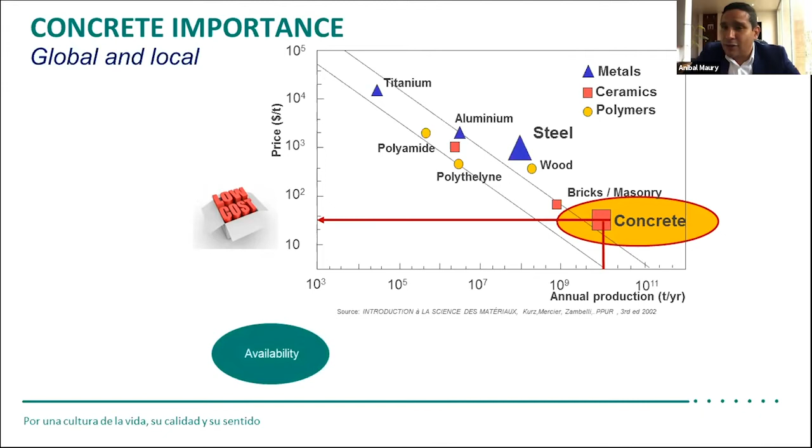And this is basically because concrete is cheaper than the other materials. There are also some other reasons I consider important to mention: it's available everywhere, so you can find the components—water, cement, rocks—mostly in any place in the world. Also, you can work with people that don't have high training or that doesn't require high training. So it's easy to work with many people compared to other techniques like steel, for example, the second largest used material for buildings.

Normally, you will require building technicians that can do welding and use proper tools. So there are still some disadvantages compared to concrete.

Then we have a very critical point, that is durability. Concrete is more durable compared to the other ones. It doesn't mean that it's eternal, but still some properties associated to durability are better than the other competitors. For example, for wood and steel, you will have to do a lot of maintenance activities very often.

Then we have another property, that is moldable. What does it mean? Concrete can have different shapes, and it doesn't matter where it is located. So based only on the casting place, you can obtain the shape you want. Compared to steel and wood, it's not the same, because steel cannot be casted in situ for a building, or it's not commonly done, because it will demand a lot of high temperature for doing this.

So basically, these are the reasons why concrete is so popular worldwide for doing buildings. However, as I mentioned, durability is one of the main issues, and surfaces of buildings are so important to avoid durability problems. But to understand the topics we are going to talk about today, it's very important to understand what are the mechanisms of damage of building structures, specifically concrete structures.

So you can have four main reasons associated to damages to buildings: mechanical, physical, chemical, and biological damages. All of them are really critical and important for the long lasting or life cycle of a building. So improving the relationship between a good design, a good material based on mix design, for example, of concrete, or an excellent construction process will guarantee somehow that the building can resist all these demands from the damage mechanisms.

For example, mechanical damages are associated to loads. What does it mean, loads? Well, for example, a building that was designed for housing cannot be changed to a library or a factory, because the loads considered for the design are only for living families and not for equipment, and vibrations can cause very big damage to a building.

That's one case, but it's also very important not to transfer design from one place to another. For example, in an earthquake risk zone, you have to design very strong buildings compared to other ones, and you cannot just move them very easily from part to part.

So this is very important for what we are going to talk today. But I want to remind you what are those mentioned phenomena that are going to be talked today. So corrosion is one of those. Probably steel corrosion is one of the phases you will remember for what is durability problems associated to reinforced concrete.

However, the problem doesn't start from the corroded momentum. The problem starts with the carbonation. Carbonation is the first phase of corrosion, if you can call it that. Carbonation starts with the diffusion of carbon dioxide into the surface of a building material and the production of calcium carbonate that reduces pH of the concrete, making it susceptible to corrosion, specifically in places where humidity is very high, salinity and temperature are high.

So corrosion is very easy in those places. That's why marine structures are always or normally corroded, but design of advanced coatings are required in those cases.

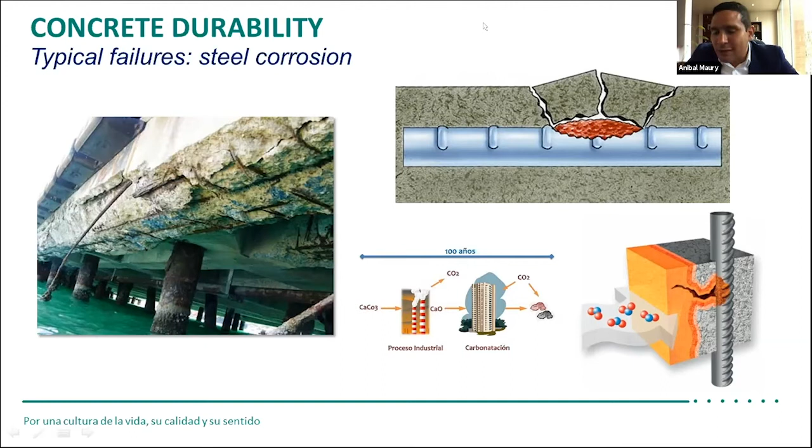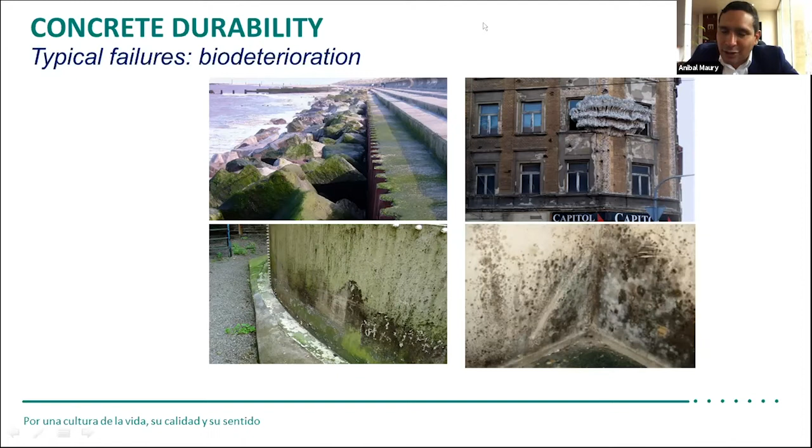Also in the upper part, you can see a building colonized by a fungi that has increased its size significantly in a huge manner. Also, there are some structures containing water that can have this situation, and some places indoor housing that are very critical, for example, not only for the building, because also they can affect human health. And we are talking about serious stuff in developing countries, for example.

But how is the mechanism working? So microorganisms find a place to fix. Not all surfaces are the ones they want. They look for surfaces that have a very low pH, high roughness, porosity, and not too intense light, but accessible to light, and also some humidity.

So these are the conditions that microorganisms like algae, bacteria, fungi, and some others find interesting to grow on. And then they feed on these nutrients, grow and reproduce, and during this biological process, they release some acids and sometimes introduce some roots in the building material that seem very simple on a human eye scale, but they are really important for what durability is focused on.

So they can really decrease durability, affecting the integrity of the element or the building. These elements normally die and they become part of nutrients that are useful for new microorganisms, more sophisticated and more complex to avoid.

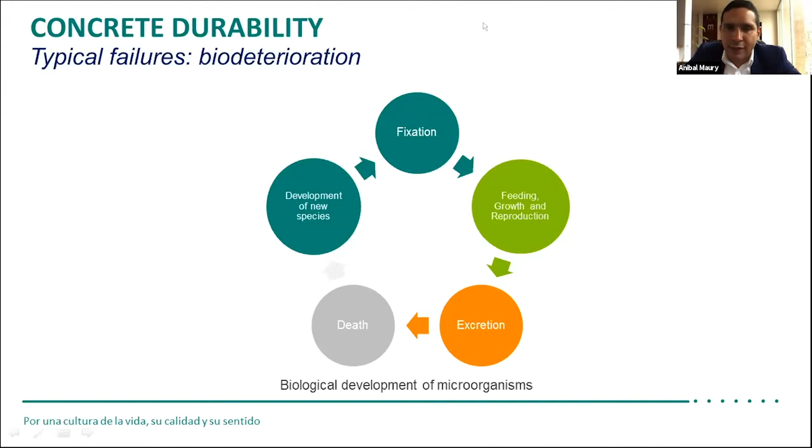So in the first stage, coatings can avoid the growth of microorganisms, and that's very important for increasing building durability. These are the microorganisms that have been very often studied for avoiding with advanced coating technologies, like bacteria, fungi, algae, lichens, and mosses. However, there are so many interesting things happening today.

For example, SARS-CoV-2, the virus that caused COVID-19, has been studied with photocatalysis to be degraded, because photocatalysis releases some substances that are able to stress the virus. Viruses have no cell wall, but it can still affect their biological process. So very interesting about what is going on in the planet.

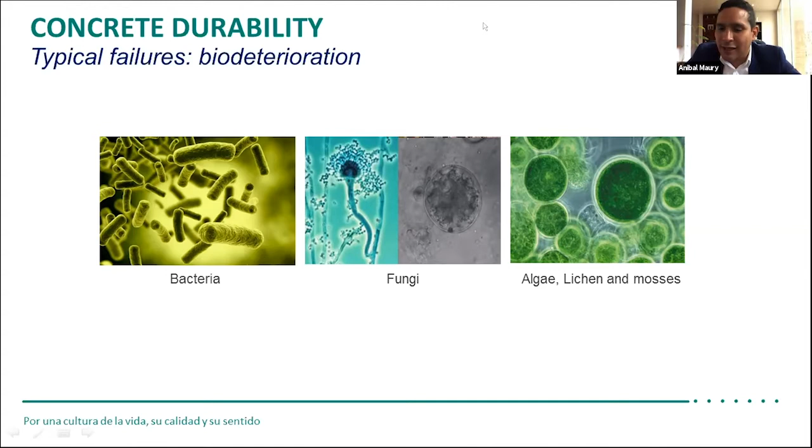There are some other damages in buildings that are very important because they demand a lot of investment in maintenance. However, they are not critical in the failure case. Some architects consider that aesthetical appearance is also a possibility of a failure.

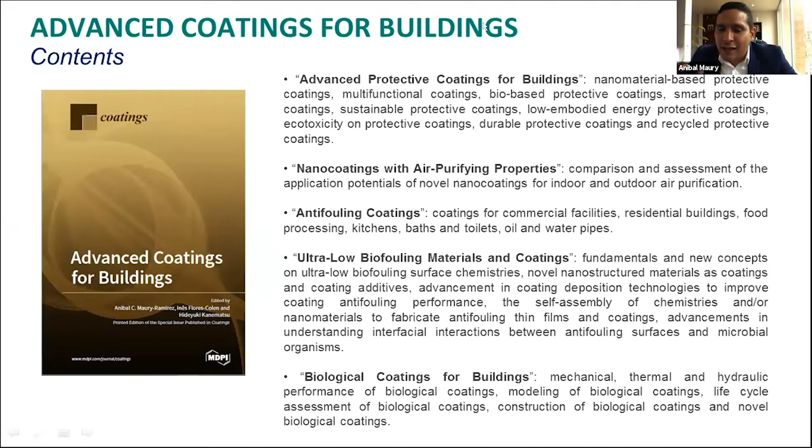This is a very interesting topic because it also considers biological coatings as an ally in the building system, improving thermal, hydraulic, and other environmental issues associated with sustainable construction. So biological coatings are also a way to improve the relationship between traditional civil engineering and construction materials and the environment. And probably this approach has been one of the oldest ones.

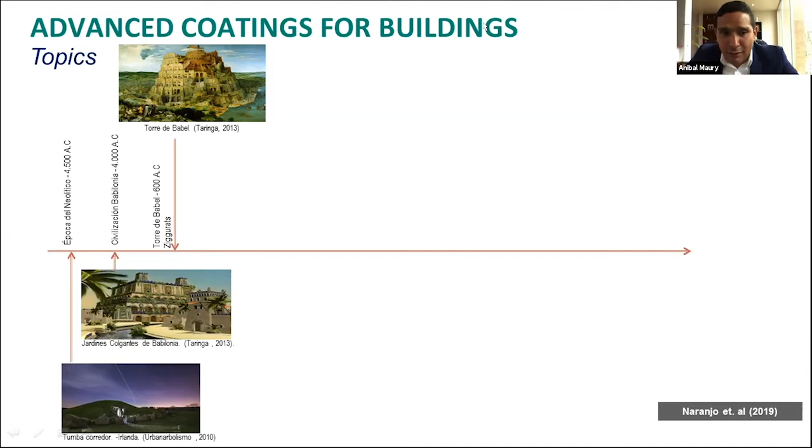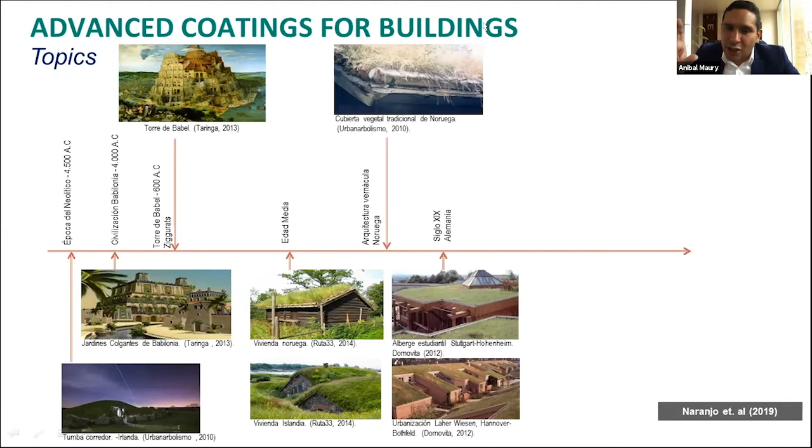For example, in the Babel Tower, biological coatings were used for reducing the interchange of heat between the exterior and indoor of the tower. And they are still related in several books. There is also evidence of using biological coatings like green roofs in medieval times. In the Nordic countries, they also used these covers to reduce the interchange of cold between the interior and the outdoor of the buildings.

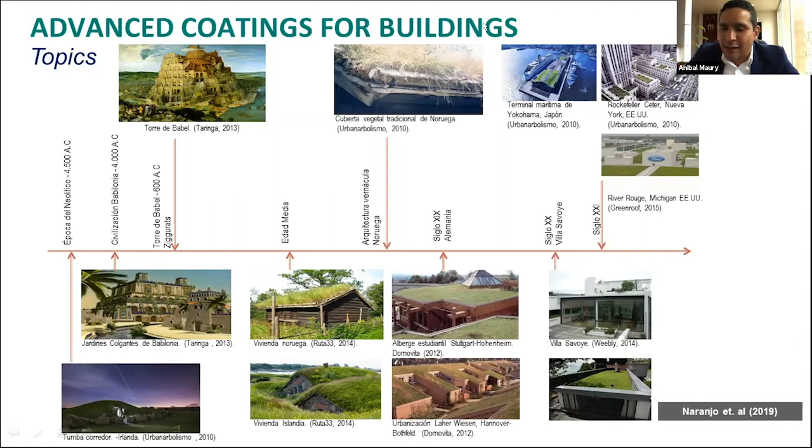This also has been included by modern architecture. Le Corbusier included green roofs as one of the main aspects in construction, as a technology to reduce the impact of urbanization in cities. So this book also deals with this topic: how to use biological coatings in a good way towards building performance.

And in this case, Naranjo et al. developed research based on the study of different recycled and reused materials to compose green roofs that were evaluated at outdoor conditions in controlled rainwater systems. For example, the drainage layer of a green roof in a building is normally composed of natural aggregates. In this case, this was replaced by recycled rubber coming from tires, a very problematic topic in the world, PET bottles,

and an HDPE tray. So all these systems were compared on three things: weight, which increases mechanical damage; second, hydraulic performance, absorbing water and releasing it to the pipelines to evacuate rainwater. Normally it is a very efficient system. And then we have another topic, the thermal isolation. I think this is a very interesting approach for this new generation of green roof systems.

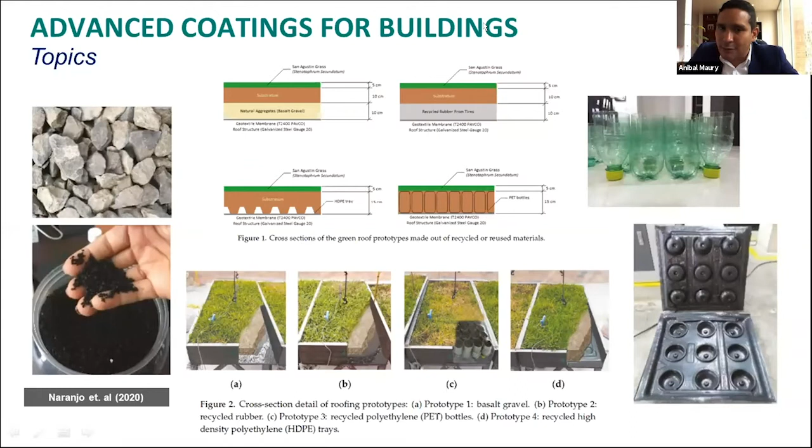So the idea of this is to improve the relationship of urbanized areas in cities and integrate them into the ecosystem where they belong, not only developing functions for the building, but also giving things to the environment, like air quality, growing of biological species, and so on. Agriculture, urban agriculture, so many topics come with this.

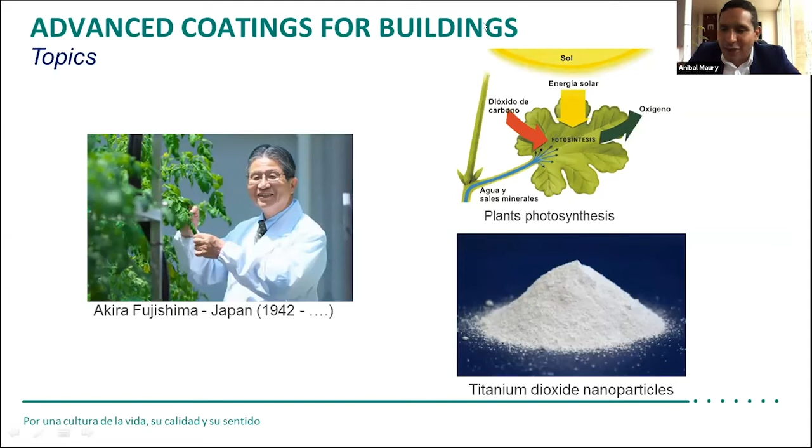And there is another interesting and advanced topic, what is called photocatalysis, that is being studied and developed worldwide by Akira Fujishima from Japan. In the 70s, Professor Fujishima tried to simulate what plants do with photosynthesis, using carbon dioxide, solar energy, water and minerals to absorb CO2 and produce O2, oxygen. So he, using nanotechnology, tried to degrade some pollutants in air and other things that are affecting the durability of a building.

How does it work? It's a little bit more complex, but I will try to explain it very easily. A titanium dioxide nanoparticle is a semiconductor material which has a valence band and a conduction band. When this material is in contact with UVA light, an electron from the valence band will be energetically activated and move towards the conduction band. Then this electron will leave a hole behind, charged positively. The difference between those two represents the band gap.

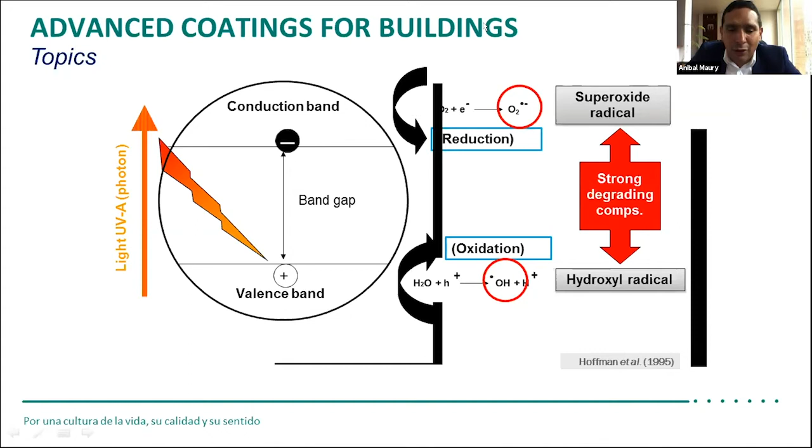The electron and the hole will interact with oxygen and with water present in the atmosphere and will produce highly degrading substances like the superoxide radical and the hydroxyl radical OH. Both of them have strong degrading capacities, not only for decreasing air pollutants, inorganic and organic. They also have the potential to reduce substances in a solid state. For example, breaking down the cell wall of algae will help the system reduce their growth on building surfaces. This is a very interesting approach that has been studied also in this book.

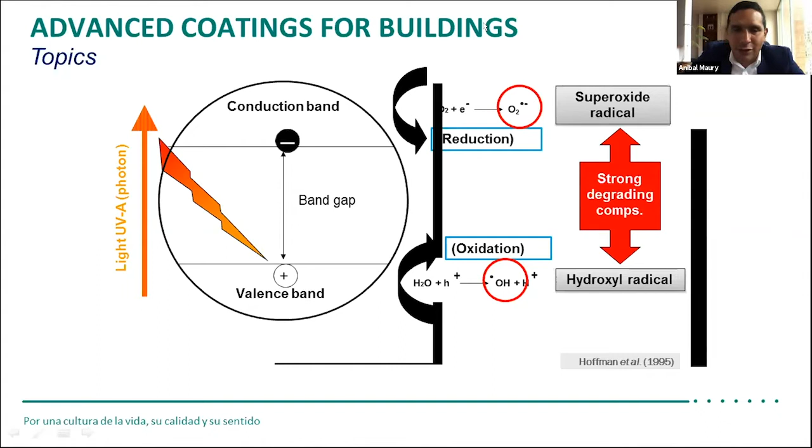So these technologies are already applied, in some cases in pilot projects worldwide. In Rome, for example, you can see titanium dioxide photocatalysis applied for self-cleaning properties in this church that was constructed by Meier for the 2000th anniversary of Jesus Christ. Also in Belgium, on the north coast, in Ostend, a building has 5% titanium dioxide as a coating on its facades.

So the results are not completely fine. That's why so much research is published in these books, because efficiency is sought by changing the crystal structure of titanium dioxide, by adding external atoms, for example, and many other strategies like incorporating recycled glass and so many other things that you will find interesting to read.

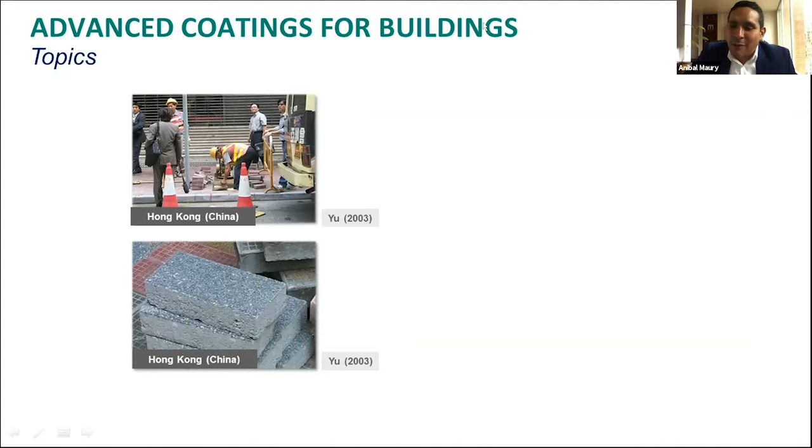Many other applications, as I mentioned, are used for air purifying properties. Paving stones including titanium dioxide have been used in Hong Kong for reducing air pollution. So next to one of the main sources in urbanized areas, which are normally cars, paving stones are included as a medium to reduce air pollution.

Also in Belgium, in Brussels specifically, we found a tunnel, Leopold II, that includes titanium dioxide coating, using UV light to improve and increase the photocatalytic activity. That's also included in the paving stones in Antwerp in Belgium.

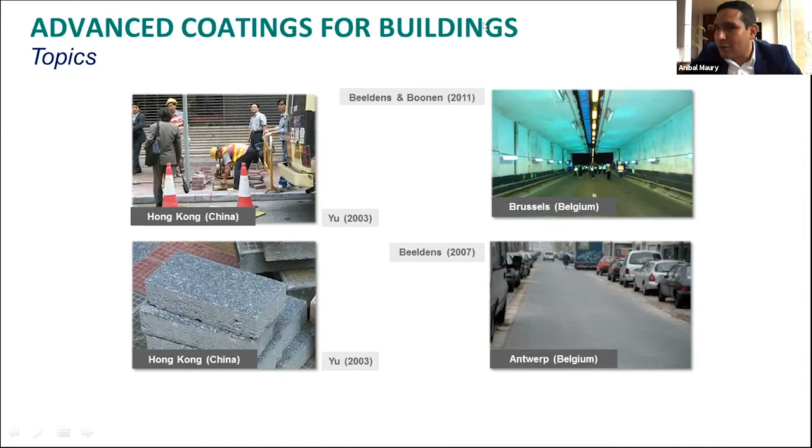So all these strategies are looking forward to an advanced system of construction that not only resists the load demands of the use of traffic or some other stuff. The point is to give new functions to materials based on the demands of the environment. I guess this is one of the main points of the future in advanced coatings.

Finally, this research also has been included by Italcementi, which is evaluating the inclusion of a big area of Milan and evaluating what the impact on air quality will be for these major cities. Results are very promising, specifically in dry conditions, so summer conditions, but not so promising for winter times, when the water comes in contact with the nanoparticles.

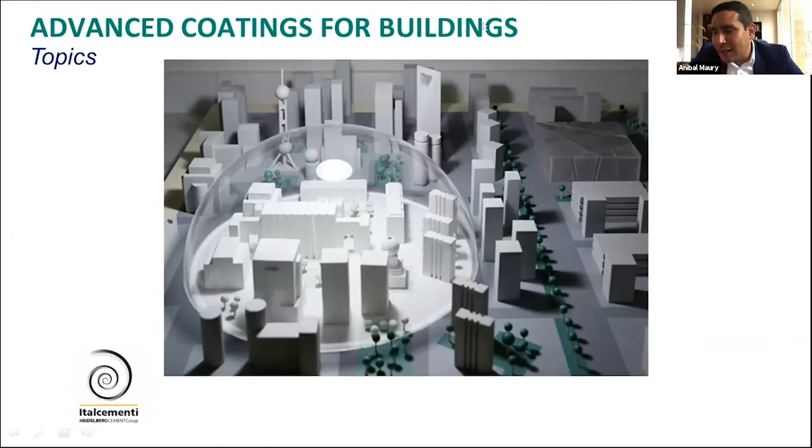Basically, these are the main or major topics that you will find in this interesting book on advanced coatings for buildings. But I will leave the word to my colleague, Professor Inês Flores-Colen, who will talk about the importance and challenges of protective treatments. Really important also for durability and giving new functions.

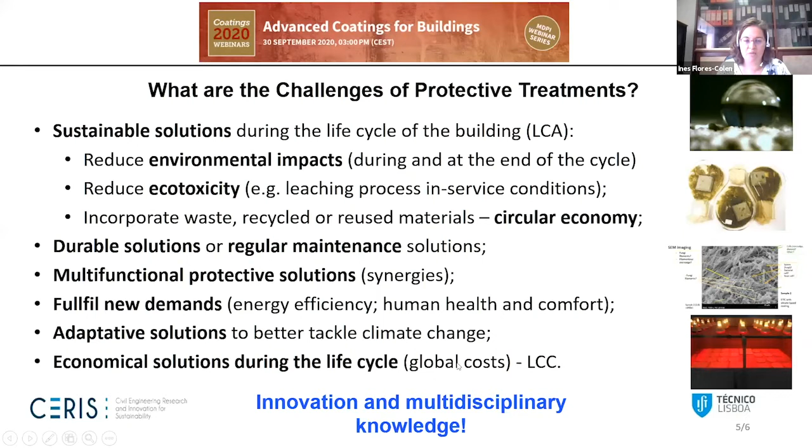So this is an idea, but maybe you can have other ideas or other suggestions that we can put in this list.

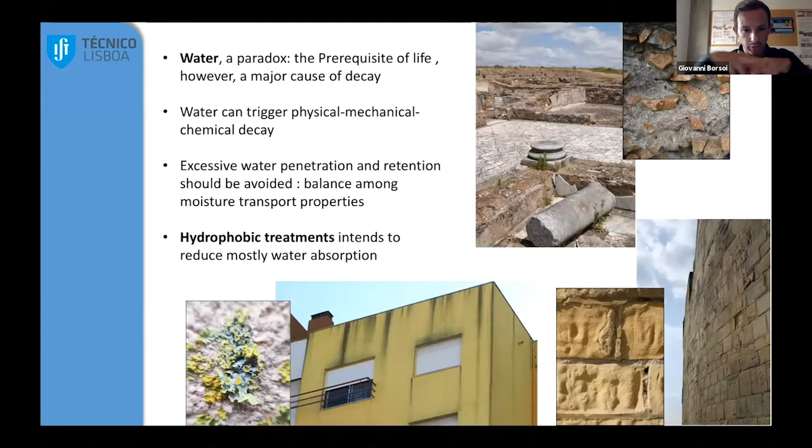Since it's the prerequisite of life, it's also a major cause of decay, since it usually triggers physical, chemical, and mechanical degradation. Basically, what we are looking for is to reduce the penetration of water, and especially the retention of water, and so to balance the moisture transport properties within the building material, especially with porous building materials. In this sense, hydrophobic treatments can be effective because they modify the contact angle, basically.

So we are looking for something with a lower surface tension. The application of this non-polar material can repel water, which is a polar substance. This is simple to explain, but there are a few prerequisites which should be respected when dealing with hydrophobic materials, especially with built heritage like limestone or mortar. We need three requisites, which are compatibility, durability, and effectiveness.

Compatibility is a big issue most of the time, because we need to respect the physical, chemical, and finally aesthetic features of the substrate. On the other side, we need long-term durability of those agents, which should increase the life cycle of modern materials, or even century-old materials like historical mortars or limestone. Another requisite is in-depth penetration if we're dealing with porous materials.

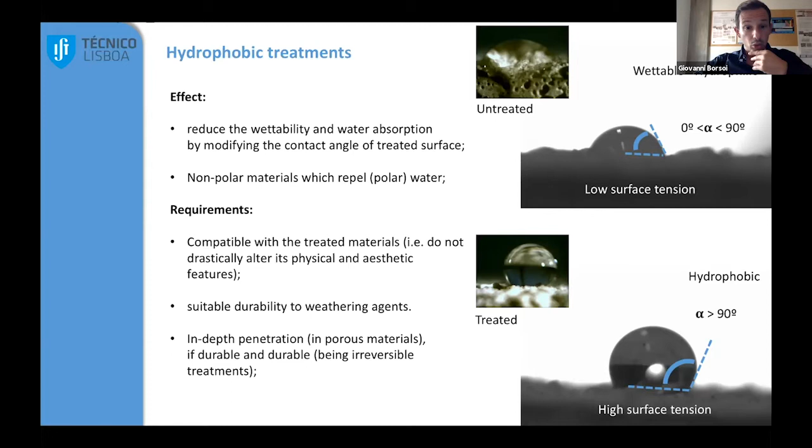We need to consider that most of those treatments are not reversible. So we need to make the right choice and be aware of the possible drawbacks and side effects. And this is the base. Then, if we look at the market, the most used hydrophobic treatments at the moment are silicon organic compounds.

So basically those materials, like silane, siloxane, and/or other resins, are based on silica and functionalized with the alkyl group. And those usually have a lot of benefits if used as a hydrophobic product, because usually you have a high resistance to oxidation processes, especially in brand new paints or brand new products, and extreme pH environment resistance. But on the other side, we know that there might be problems related exactly to those two components, especially after a few years.

On the other side, there is a wide application of those materials also because there is an aesthetical compatibility and they're kind of easy to apply. And they are irreversibly bonded to the mineral substrate on the treated material. Then there is an issue, which is still the durability, because most of the manufacturers are not reporting the durability. They're just arguing like 3, 5, 7 years, up to 10 years, which is kind of ambiguous, because it's difficult to make the right choice sometimes for a specific material, especially as they're not providing much information about the compatibility among materials and the specific products.

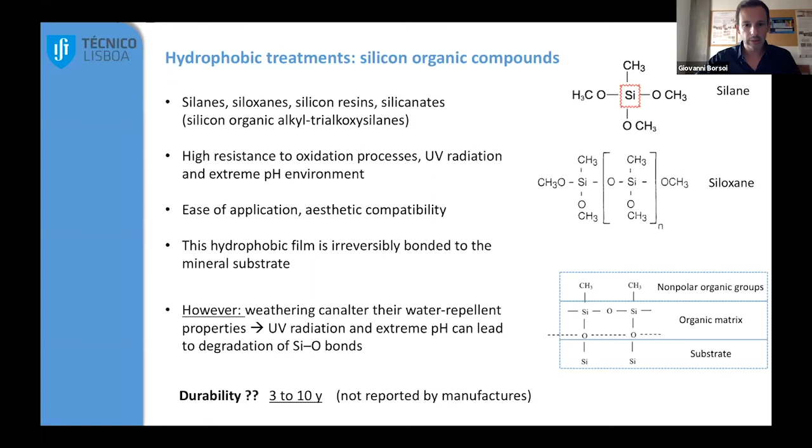So this is the main question, because we know that there is a compatibility of silicon organic compounds as hydrophobic materials. On the other side, we know that there is a problem of durability. After a few years, problems arise. And so we don't know exactly which are the dynamics beneath those issues. So durability and effectiveness are going on the same level. Maybe we have super hydrophobic materials in the first 2-3 years, then there is a degradation, and we end up after a few years with a problem. So we are basically accelerating the decay of the material, because those irreversible treatments cannot be taken out of the treated materials.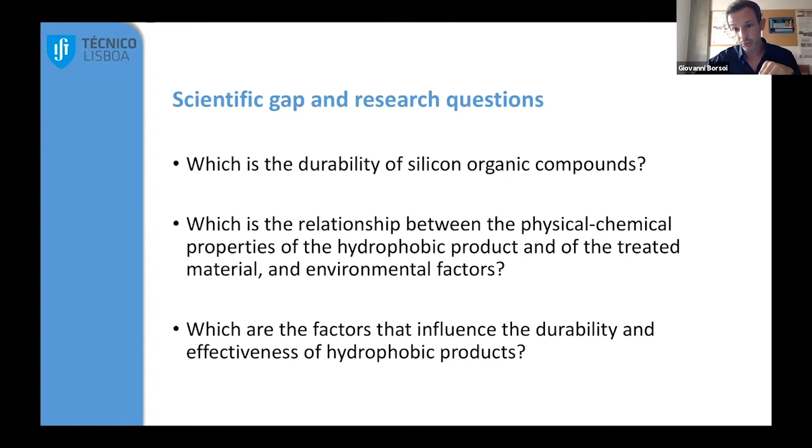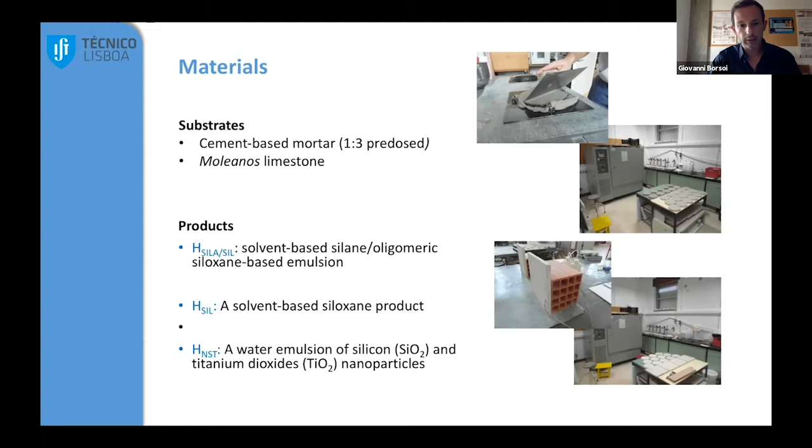So in this research, we have focused on a few materials, a couple of cement-based materials actually, a limestone and a mortar. And we have been focusing also on silane or siloxane products, a siloxane product. And finally, the third product is basically an emulsion of silicon and titanium oxide nanoparticles.

Basically, those are the methods. We have been applying the materials with a specific process, which you can find in the special issue. Actually, all the details are in the special issue. I will just give an overview. Then we have been focusing on the moisture transport properties, so the capillarity, water absorption, the drying, the Karsten tubes test, and the water vapor permeability. And finally, we repeated all those tests after artificial aging. So I'm going straight to the results.

What we can see here is that there is a strong influence on the capillary water absorption when dealing with those silane or siloxane based materials. For example, if we look at the stone, there is a strong reduction, up to 88%, of the water capillary absorption. And there is a linearity among all those products. After artificial aging, we still have quite a high reduction of those values. It can be quite unexpected, since maybe we're expecting the capillarity to increase after artificial aging. But with the limestone, there is probably a pore filling due to the artificial aging, which is decreasing the water capillary absorption.

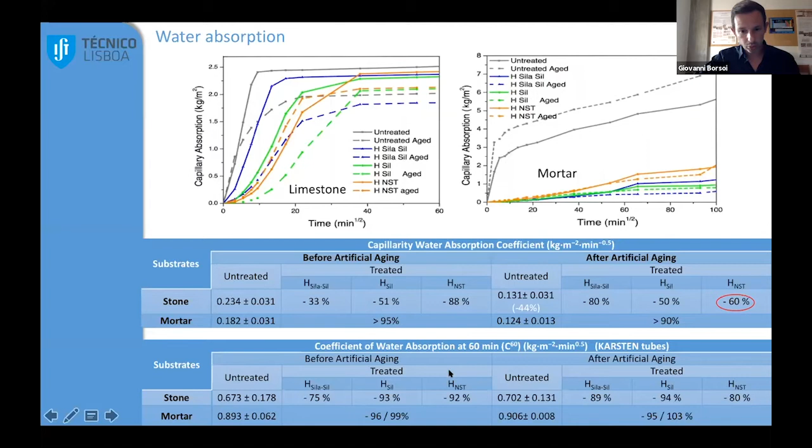Those two silane or siloxane products are quite linear. On the other side, there is an inverse trend after aging: after artificial aging, there is an increase of the water capillary absorption in the case of the nanostructured product. The mortar is not much affected, because in both cases there is a high reduction of this water capillary coefficient, and this is reflected also in the Karsten tubes test. The same trend can be seen also on the limestone.

When we look at the drying kinetics, in the case of the limestone, we can see that in all the cases the liquid phase evaporation, the first step of drying, ends after 1 day. So in all the cases, at 24 hours there is basically an inversion of the drying process to the vapor phase.

On the other side we can see, and this is the limestone, on the right you can see also the mortar, and in this case you can see the variation, so the transition from the liquid to the vapor phase is usually up to 4 days. So those two materials are very different because of the porous networks.

And once again, if we look at the drying index, we can see that actually there is a slight increase of the drying index after the application of the hydrophobic products. In the case of the nanostructured product, this increase is very low, and it ends up similar as well after the artificial aging. So it seems that those nanostructured products are pretty suitable for this kind of limestone.

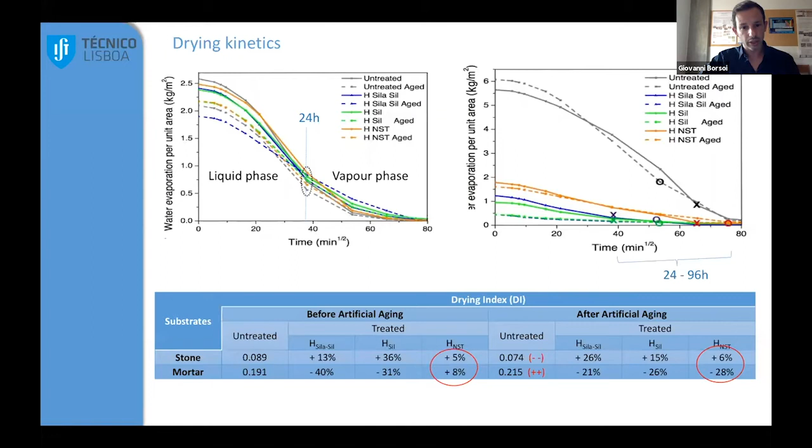Then there is also another interesting part, which is the water vapor permeability. We can see actually that there is a huge increase. So the hydrophobic materials are really affecting the water vapor permeability, and mostly the siloxane-silane product is affecting strongly this behavior. On the other side, the nanostructured one is more compatible, or at least less invasive compared to the others. And after artificial aging, once again, the nanostructured material is much better because there is lower reduction of water vapor permeability.

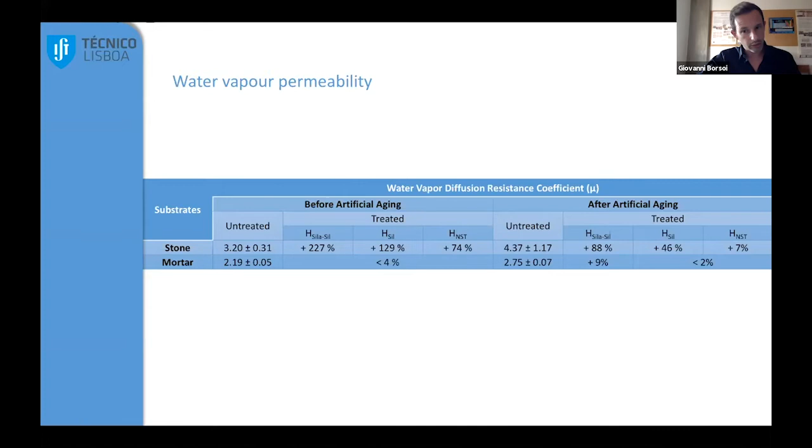Once again, the limestone has a very different behavior when compared to the mortar, where the porosity is much higher, the pores are bigger, and so the reduction is lower because the product cannot completely fill the porous network.

And so basically we can summarize what we have seen in the previous slides. If we look generally at the application of the hydrophobic product, we can see that there is a reduction of the capillary absorption, and that is what we are looking for actually. So those are positive properties. Then the second one, which is the drying index, we can see there is a differential behavior among the limestone and the mortar. And this balance should be respected. That is, the drying time should not be modified, because if you're looking for a very compatible material, you need something that is not completely affecting the drying phase, the drying index.

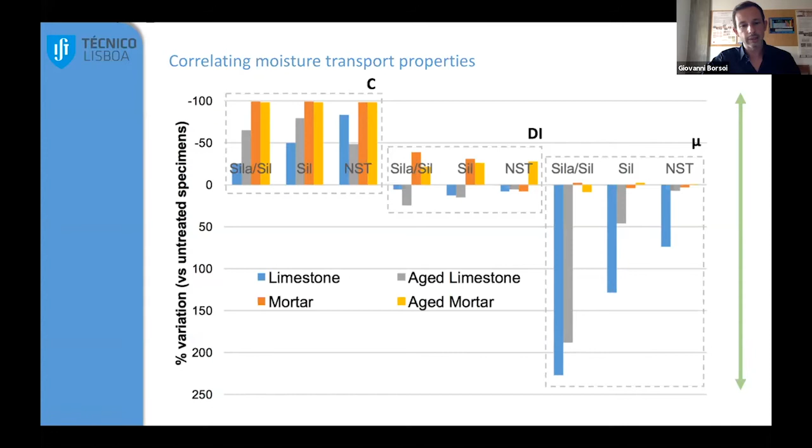At the end, we have also the water vapor permeability, and we can see that, for example, in the case of this siloxane-silane product, there is a huge decrease of the water vapor permeability. And so for sure, this is something that we are not looking for. We're looking for something that is slightly affecting this value, and so once again, respects the properties of the original material.

So to conclude, since I'm already almost out of time, the main lesson I would say is that you need to fine-tune the effectiveness of the water repellent based on the properties of the treated materials, and of course based on the typology of hydrophobic product that is applied on those materials. For example, the limestone has a much lower absorption compared to the mortar. So you need to consider this. You need to look for something that is respecting those physical properties.

And then you need to consider that durability, which is connected to those artificial aging tests, affects the materials in a different way as well. For example, we have seen that the nanostructured material has a very efficient feature over time, but on the other side, these nanostructured silica and titanium-based materials are less durable, because after artificial aging there is probably a decrease, and this is due mainly to the structure of the titania, which is linked within the porous network of the silica nanoparticles.

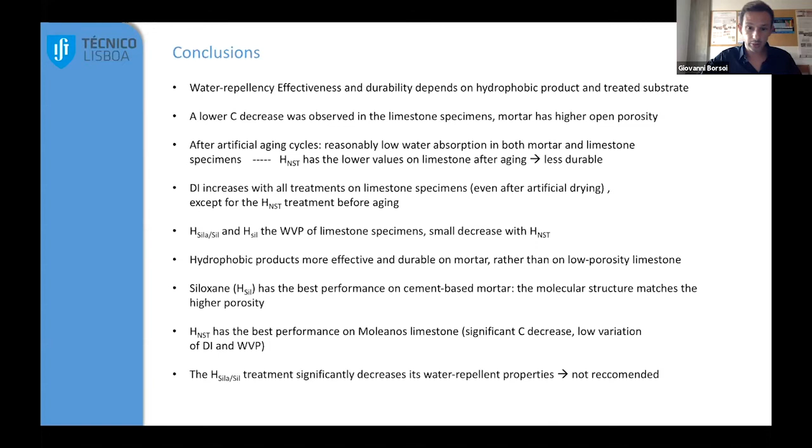To give an idea about what is going on at the moment in the project, as Professor Inês mentioned, we're also focusing on other features of the multifunctional treatments, because at the end of the day, we know that a hydrophobic product usually also provides some anti-graffiti features. It also contains a biocide, so it has an anti-fouling effect against fungi or algae and other biological colonizers.

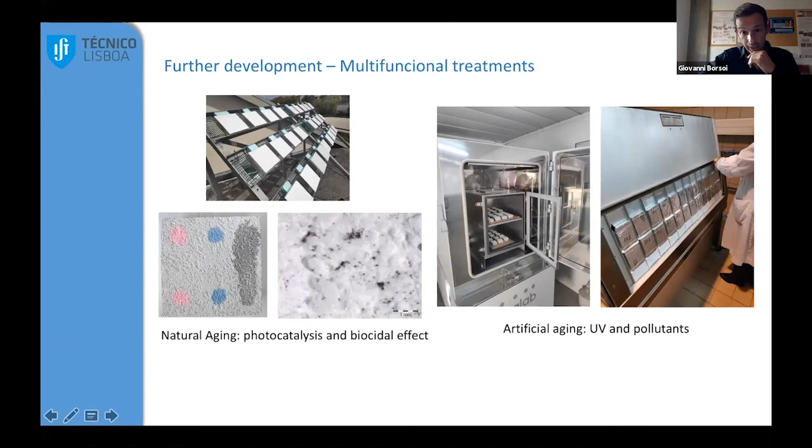And when dealing with urban areas, we also have graffiti and pollutants, which are very invasive and can be a strong problem for substrates. So we are evaluating all those features, and at the same time providing data on the long-term durability, with both natural aging and artificial aging tests.

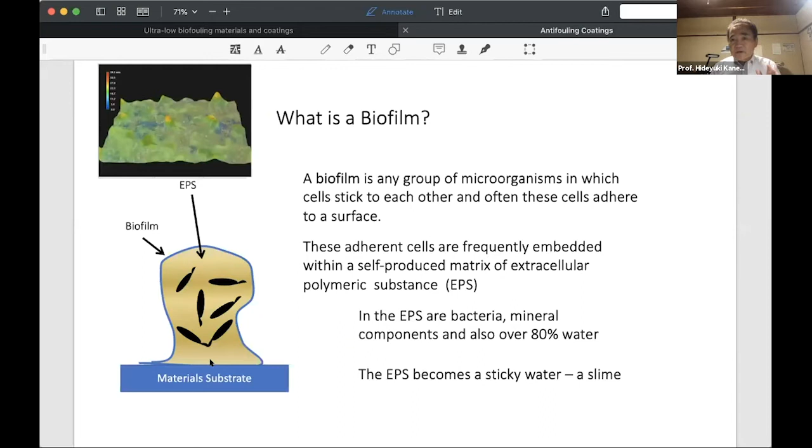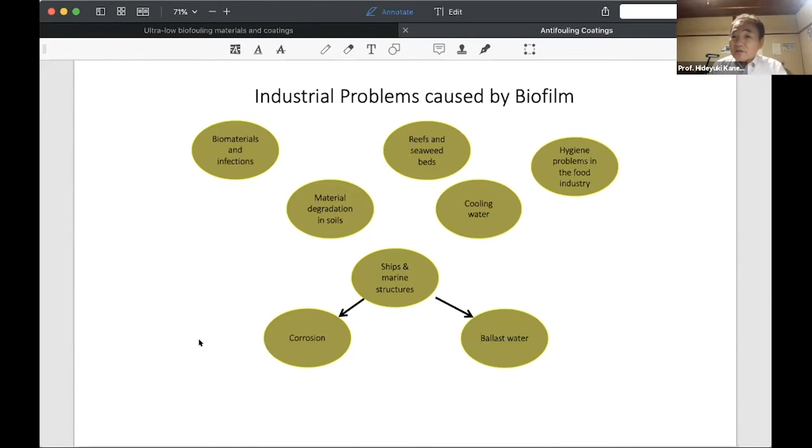And recently, very important problems appeared. As you know, since the end of last year, the COVID-19 problem occurred. In such a case, we are afraid that human matter and human infection may occur - I mean, infection occurs through matters.

For example, a human touches the door or wall, then virus or bacteria move from the human to the material. But on the material surface, they don't lose their activity, and another person comes and touches the material - then the second person may be infected. Such a problem occurs, and the antibacterial market, including virus, bacteria, and biofilm, is increasing very rapidly nowadays.

Therefore, anti-fouling coating is nowadays very important. Its importance is increasing nowadays.

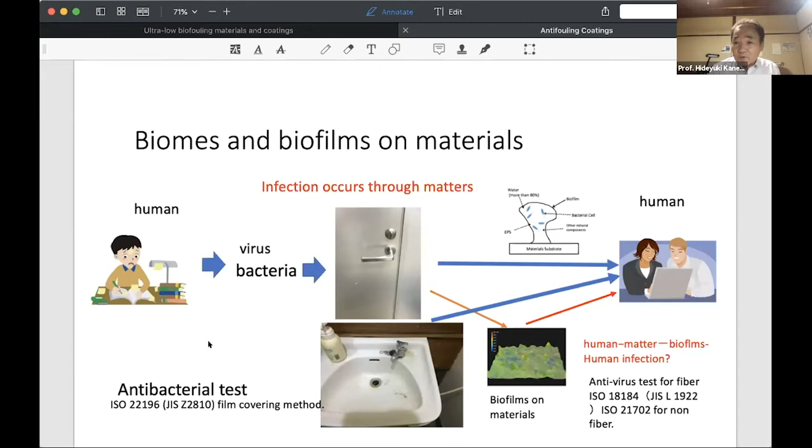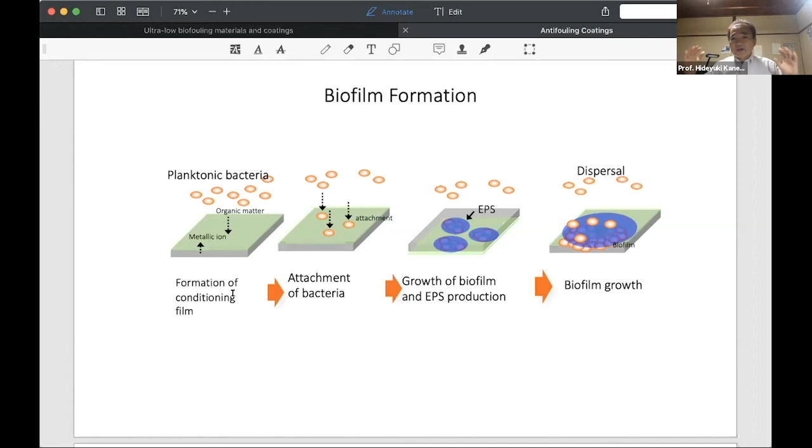Then the attachment increases, continues, or some bacteria may detach. Such attachment and detachment processes may repeat, but finally the attachment process exceeds the detachment process. Then the number of bacteria increases on the material surface and reaches a threshold value. Then bacteria excrete polysaccharide simultaneously, and the material surface, including the bacteria, is surrounded by a sticky biofilm. That is the biofilm formation.

So how can we develop anti-fouling coating? Before that, we have to produce biofilms artificially in the laboratory. We need a common method if possible, and then we have to have an evaluation method. But these two general methods have been missing.

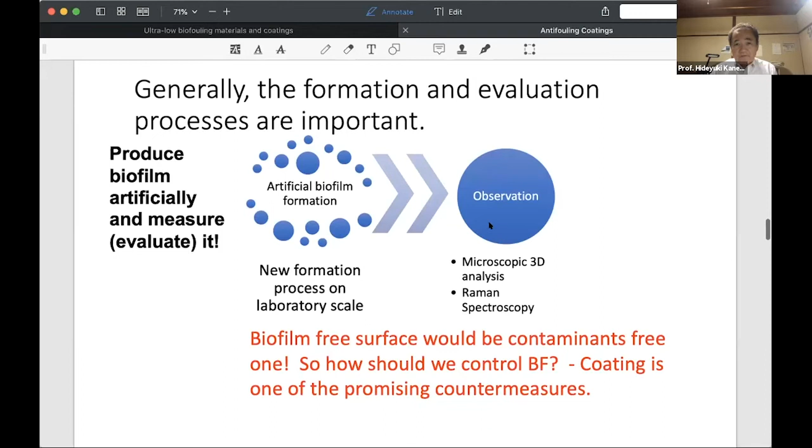Therefore, my colleagues and I have had to establish the biofilm production process and the evaluation process over a couple of years so far. This slide shows that biofilm forms first in the laboratory, and then we have to observe that quantitatively or qualitatively.

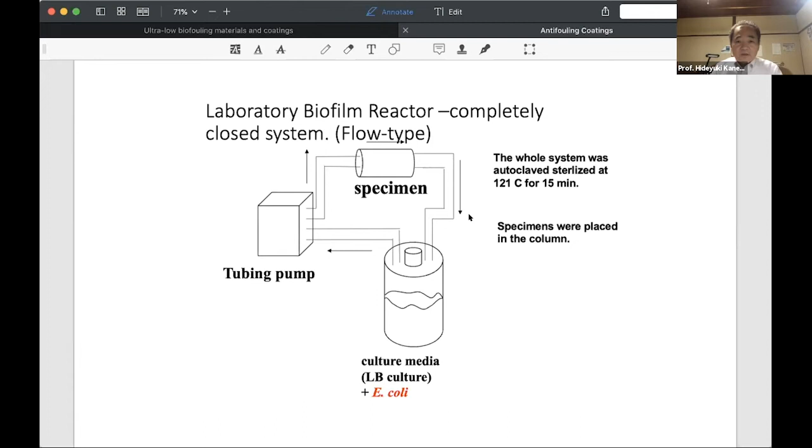That is one of the methods. In this method, a single species forms biofilms - for example, Escherichia coli. But the general interest is how environmental biota, mixed germs, form on the material surface - how does environmental biota form on materials.

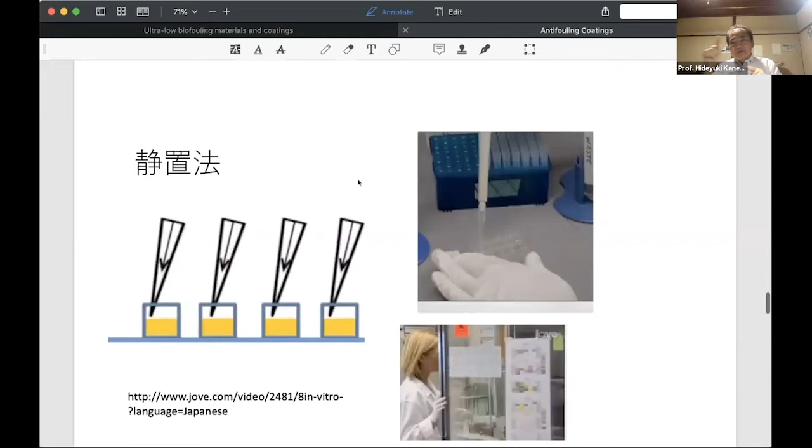This is another method. I have shown you the flow type laboratory biofilm reactor, but in this case, another static method using plastic wells. I'll show you right now.

Plastic wells and specimens, and bacteria culture specimens are put into the well. Each well is filled with the bacterial solution, then placed in the incubator for a couple of days or hours. After incubation, we remove the specimen and analyze the biofilm on the material surface.

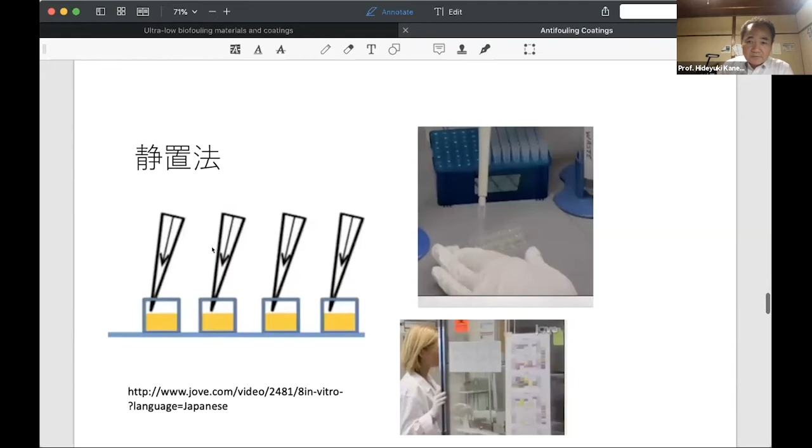How could we evaluate the biofilm quantitatively or qualitatively? This slide shows that there are many methods, but we always focus on two methods. EPS is the characteristic of biofilms.

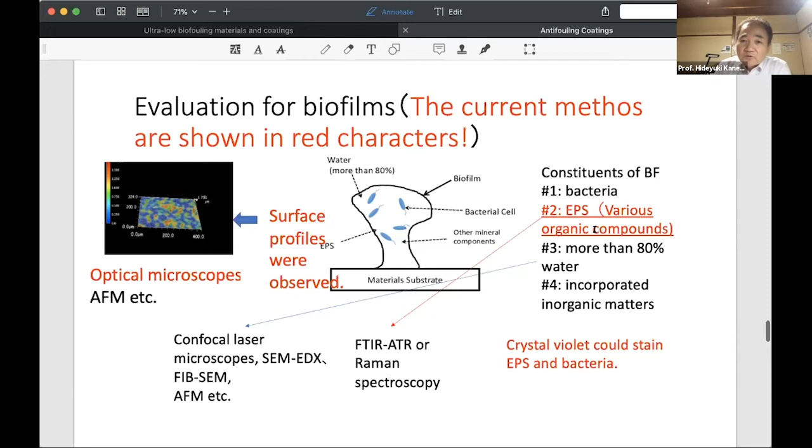One of them is Raman spectroscopy, which enables us to analyze the organic matters on the material surface. However, this is not suitable for quantitative analysis. Companies always need a concrete figure, a concrete number, like 3, 4, or 5. Therefore, for such a purpose, Raman spectroscopy is not appropriate. It is appropriate for academic research, but not good for quantitative analysis. Therefore, usually we use crystal violet and its staining.

This slide shows that crystal violet absorbs the polarized part of the molecules, and the color changes to violet color, as shown in this slide.

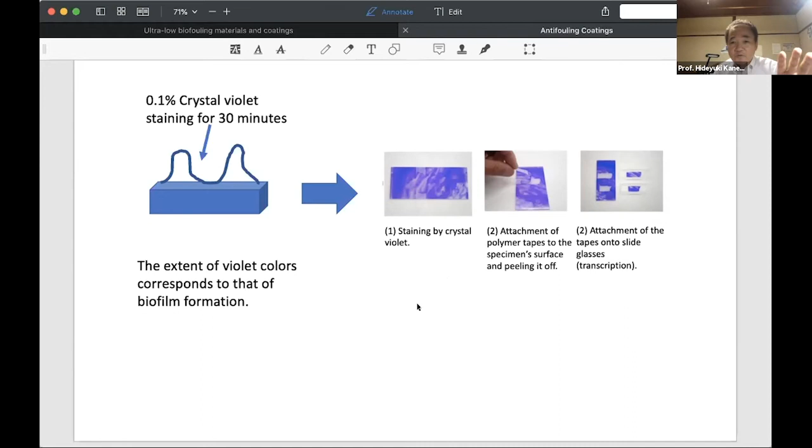So usually we use such a method: biofilm forms, and then we stain the biofilm using 0.1% crystal violet. Then the stained crystal violet is dissolved into a surface active agent, for example sodium dodecyl sulfate or ethanol. Sodium dodecyl sulfate is recommended, but anyway it is dissolved.

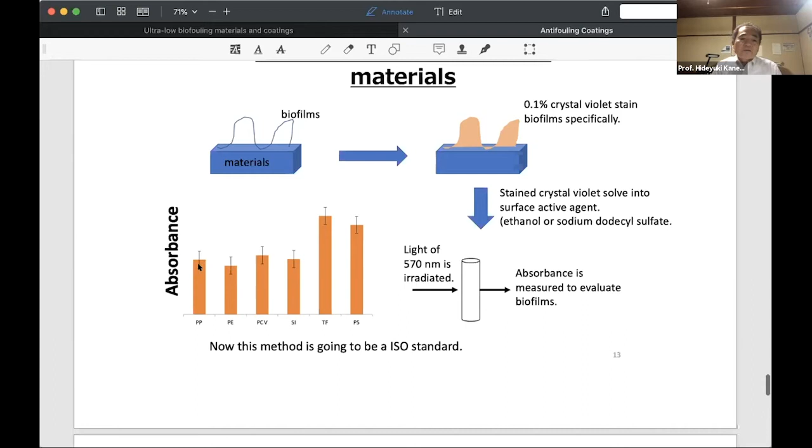Light of 570 nanometers is irradiated, and crystal violet absorbs the light of 570 nanometers specifically. Therefore, we can evaluate the biofilm quantitatively by measuring absorbance.

In such a way, we analyze the antibacterial, anti-fouling properties of materials. At the same time, if we develop an anti-fouling coating, we can evaluate the anti-fouling properties quantitatively and correctly using this method.

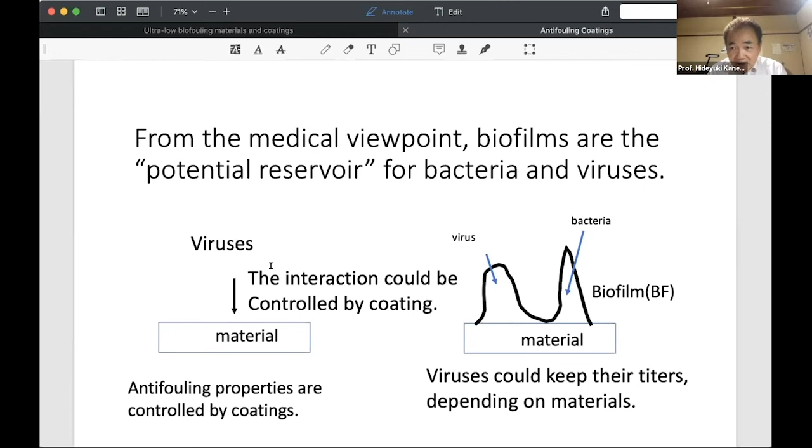As I showed you at the beginning of the presentation, biofilm affects many industrial fields. If a coating solves the fouling problems, it will be applied not only to buildings—building is a very important purpose—but there are also many problems caused by biofilms in other fields. Therefore, such a coating will work well for many industrial parts.

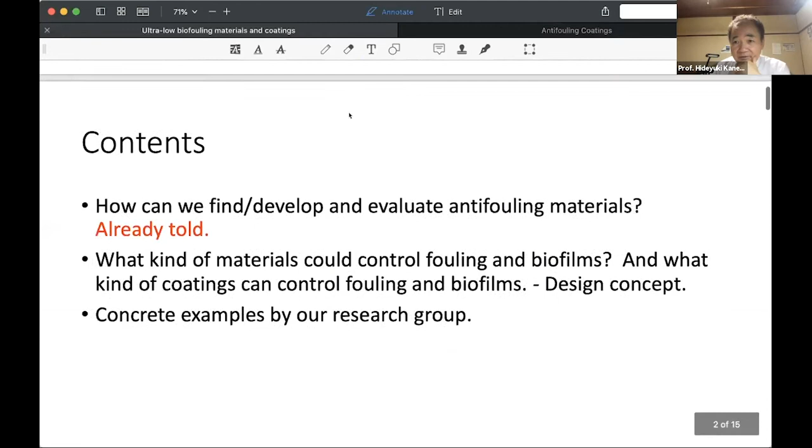Let me continue with the second part of the presentation, entitled 'Ultra Low Biofouling Materials and Coatings.' Now you understand what kind of measurement we usually carry out. The next step is that we have to develop the anti-fouling coating. I'll explain about that in the second part.

This slide shows the contents of the second part: how can we find, develop, and evaluate anti-fouling materials? I have already told about that, but what kind of materials could control fouling and biofilms, and how can we differentiate the materials among the many candidates?

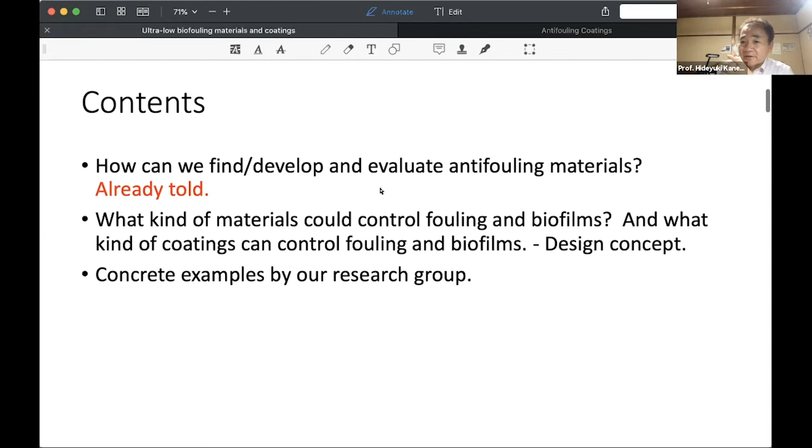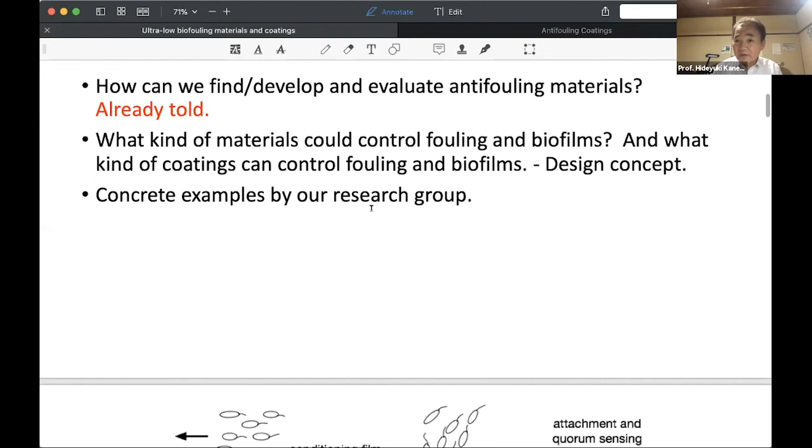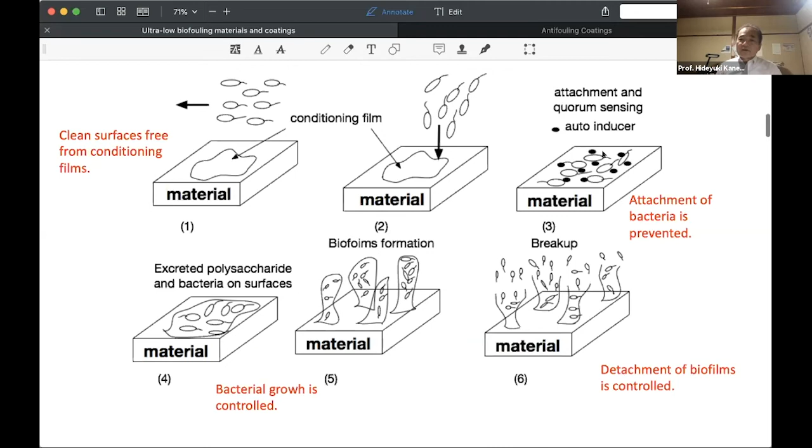This slide has already been explained—it shows the mechanism of biofilm. But let me stress here that the biofouling process is composed of multiple steps. Therefore, a coating may work well at one point, but another concept may work well at another. This is a very complicated problem, and this slide shows that.

Coating materials are classified into three parts according to material science: metallic materials, ceramics, and polymers. They have their own energy to form condensed matter. Therefore, we have to classify them into three parts.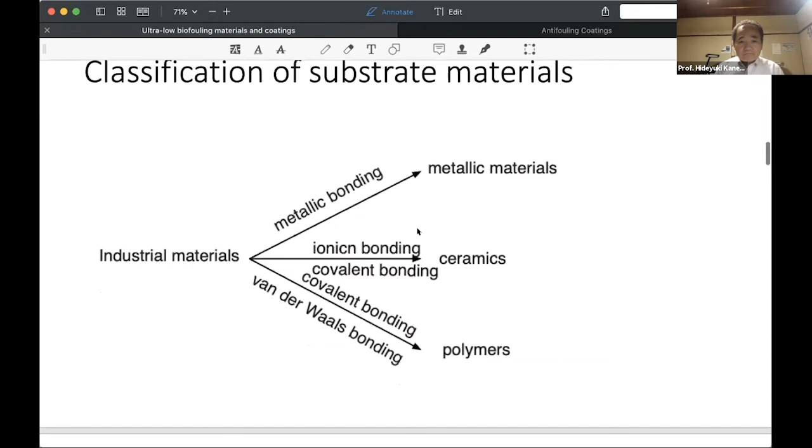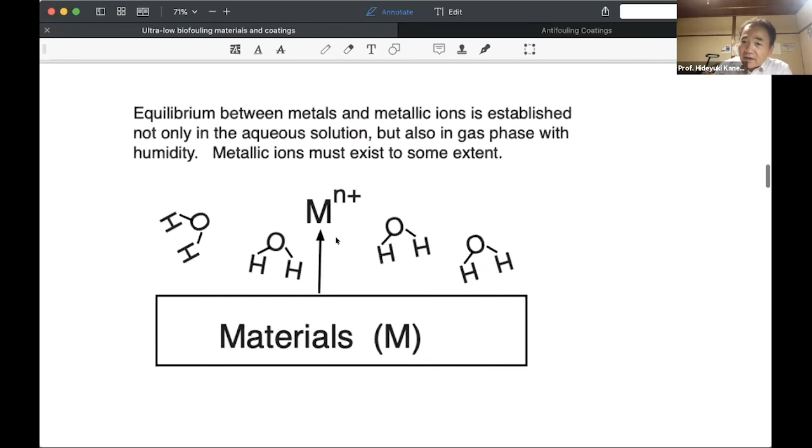In the case of metallic materials, metal dissolves into metallic ion and exists in the environment. This ion has a strong or weak interaction with the bacteria, with the proteins around the bacteria, or with the biofilm itself. Therefore, some metals work well and others don't. For example, iron metal attracts bacteria very strongly. Therefore, from the viewpoint of surface coating, we have to stop the dissolution of metallic ion into the environment—that is the guideline for anti-fouling coating.

People sometimes say copper has antibacterial properties. However, copper basically has a strong interaction with bacteria. Therefore, at the beginning, copper ions may work, but over time copper gradually loses its antifouling effect. Such a discussion would be possible.

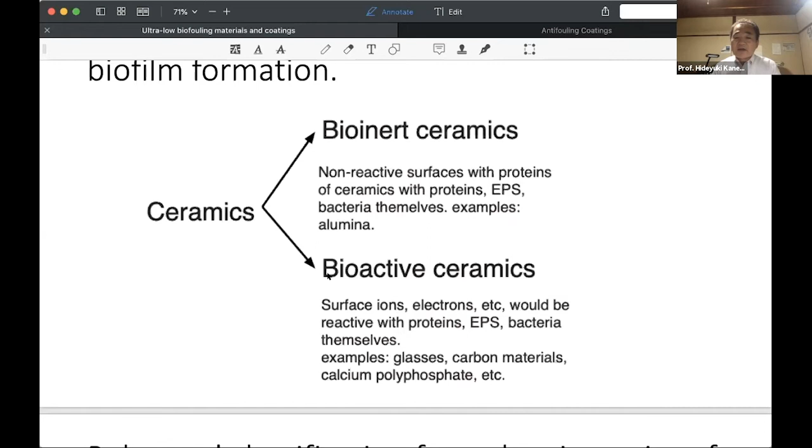Ceramics is classified into 2 types: bioinert ceramics, like silicon nitride, aluminum oxide, or silicon carbide, or something like that. They don't show any van der Waals force on the outside of the specimen. On the other side, in the group of bioactive ceramics, the material has a strong correlation with interaction with the bacteria or biofilms. So some ceramics work well for antibacterial properties, but other ceramics don't at all.

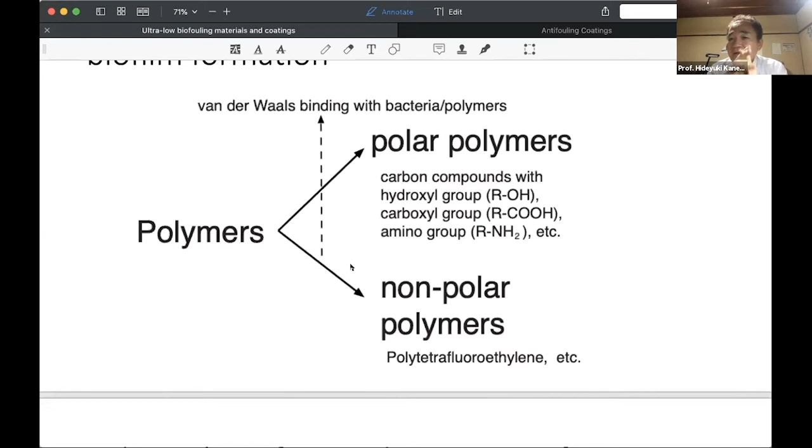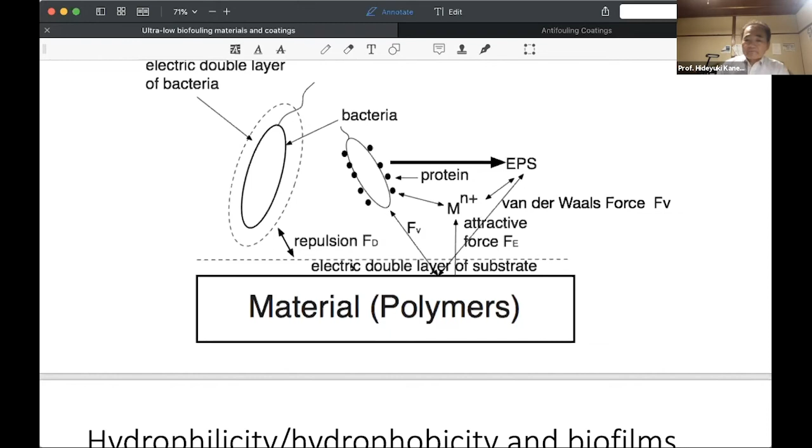And polymers are classified into 2 types: polar polymers or non-polar polymers. From that viewpoint, I believe that we can arrange some polymers. This slide shows one of the polymers. On the polymers, how do components interact with bacteria or the bacterial environment? Van der Waals force or electrostatic force may work simultaneously or independently. It depends. And hydrophobicity and hydrophilicity are also important problems.

But as for the concepts, there are many contradictory results. Some people say that hydrophobic polymers would accelerate biofilm formation, but others deny that. Maybe the reason could be attributed to biofilm formation being composed of multiple steps, as I showed you in the previous slides. At some step, hydrophilicity and hydrophobicity work differently, and at another step, another factor may be involved. Therefore, it is very difficult to determine the effect of hydrophilicity and hydrophobicity on biofilm formation.

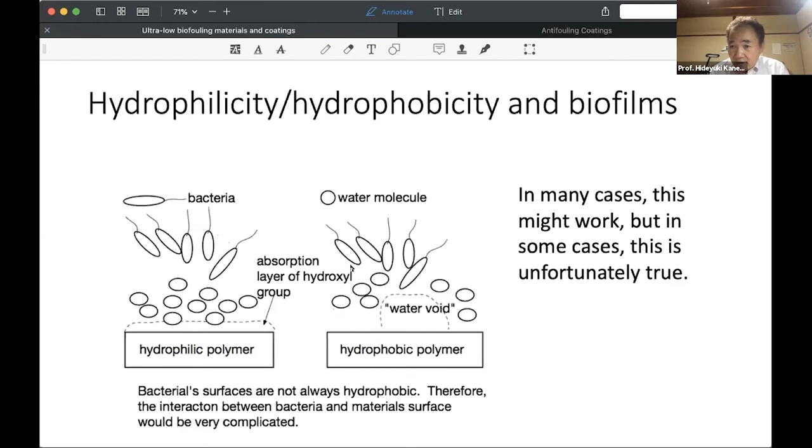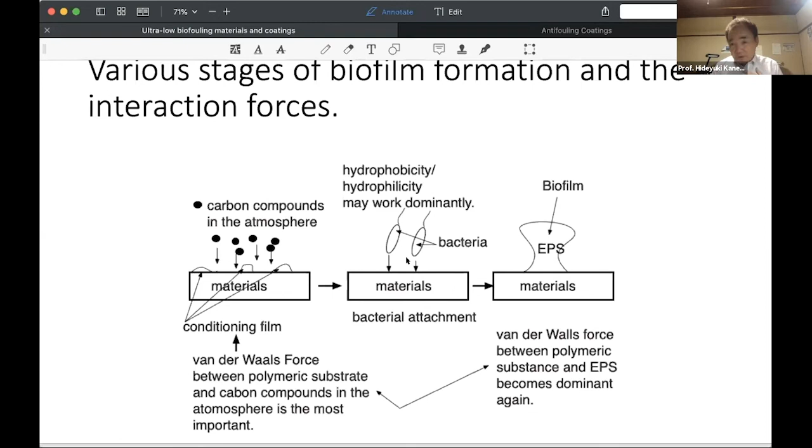Personally, I observed that hydrophobic polymers will be good to protect against biofilms, but it depends on the combination of materials, environment, and bacteria themselves. So there are various stages of biofilm formation and interaction forces; as I told you, biofilm formation is composed of multiple steps. What kind of steps do we aim at to develop antifouling coatings? That is a very important problem.

Then the 2 layers were melted into each other by adding heat. Then intermetallic compounds form. And the intermetallic compounds of, for example, silver and tin showed very high antifouling properties, because silver dissolves into the environment gradually. Gradual dissolving is very important.

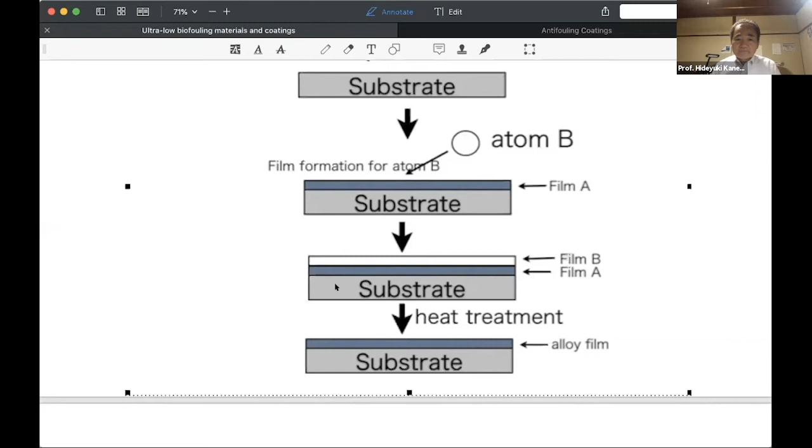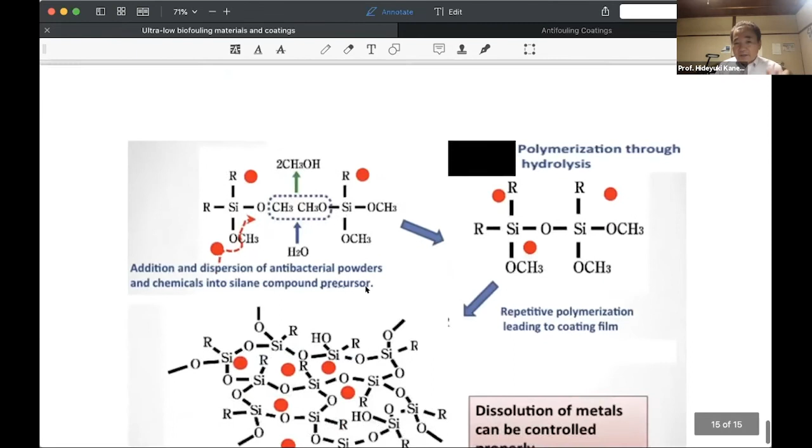And the polymer brush is another one. My time is running, so I will give a very brief explanation. This is a polymer brush. The polymer brush is also one of the promising coating methods against fouling phenomena. And for this one I got a Japanese patent, and I still hold it because it is going to be sold. A silane compound is the substrate, but nano-silver, nano-copper, or other nano-metallic antifouling metals are dispersed into the coating. So it shows very high antifouling properties. As shown in this slide, this composite coating is very good, I think, privately.

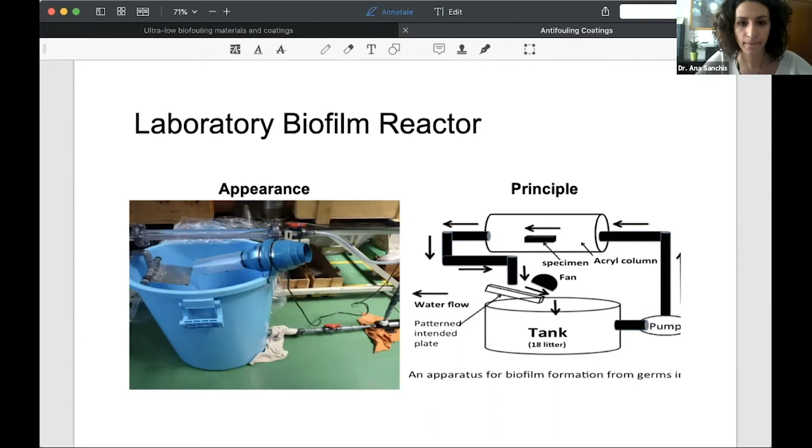Many thanks, Anna, and many thanks, Raynor, for the question. Actually, it's one of the major concerns: how to evaluate the environmental, social, and economic impact of a green roof using recycled, reused materials. For example, we are trying to implement a whole city with vegetated surfaces of green roofs and green walls in order to improve thermal, hydraulic, and many environmental issues in a city called Cali in Colombia, with 3 million citizens. So to give practical tools to the decision makers, you have to give a life cycle assessment of every green solution.

The idea of doing this life cycle assessment for green roofs is to change construction from a linear economic system, where you have extraction, processing, use, and disposal, to a more circular perspective that includes recycled and reused materials. So the extraction of environmental goods is not the same as extracting just rocks. You have to compare the extraction phase using natural, non-renewable resources to this waste incorporated into green roofs.

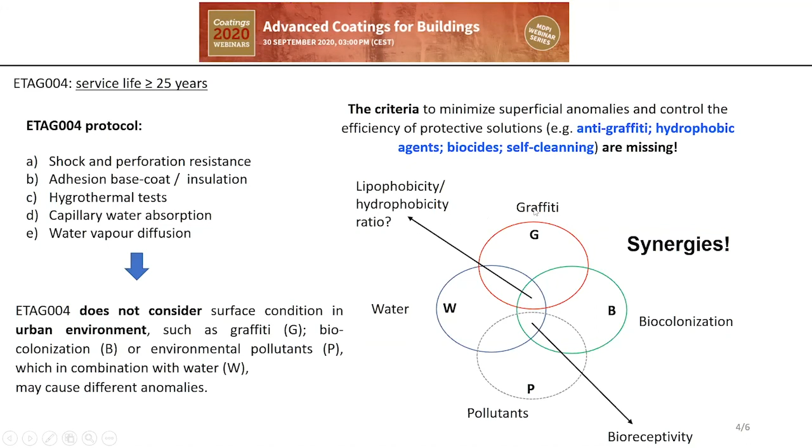Yes. So this is what we call ETICS, an external thermal insulation composite system. If you want to know more, you can consult the guideline that I mentioned. This is guideline 004 that is only specific for this system. So in the layers, you have a thermal insulation layer. We are studying 3 types of thermal insulating layers: mineral wool, EPS, and cork, which we use a lot in Portugal. So this is the thermal insulating layer.

We have a mechanical fixing to the substrate or not, but usually you have a mechanical fixing. And then you have a mortar. Usually this mortar has resin, or is not only cement, because you need to have some strength. But because of sustainability and durability, the manufacturers are also trying lime. This mortar intends to guarantee the boards, because this thermal insulating layer is a board. So we have 2 thin layers, base coats with a mesh. And then we have the finishing.

So in this project, we are studying the finishing, because if you have cracks or problems on the surface during the service life, you can affect the performance of the whole system. For example, if you have water in a mineral wool thermal insulating material, you have a bad performance, because it's not good to have water in this kind of thermal insulation. So it's very important to study the finishing coat for other types of degradation agents. So I think it's clear.

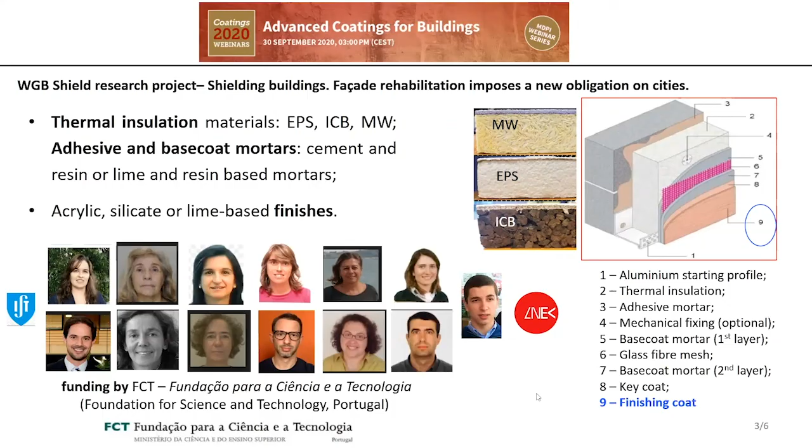And then you have different details, like metallic details, to guarantee the protection of the corners and the bottom part. You have the email, and if you have any more questions about it, you can send them to me.

Okay, thank you for the question. And I think this is for Dr. Giovanni, if not, correct me. How did you select the accelerated aging protocol? Is the hydrophobic effect due to the chemical nature of the particles, or to their size? Yeah, I already saw the question.

Well, when we are dealing with these artificial aging protocols, we are always adapting specific tests from other materials. In this case, as I mentioned in the presentation, this is the new European norm, 1015-21, which is about the determination of the compatibility of mortar for external renders. Among those tests, there is also a specific test for artificial aging evaluation. We adapt it, we have many years of experience and many tests done with this kind of test, and it's working, and it's already published and referenced.

And of course, I'm talking about mortars and limestones. For stone, there are also other types of possible tests. For mortar, this is probably the most suitable one. But if you're looking, for example, at external thermal insulation systems, ETICS, there is another type of test, which is the ETAG, already referred to by Professor Inês. The ETAG 004 is slightly different. But in any case, all of them use extreme thermal shocks, like freeze-thaw or heat-cold cycles, to evaluate the durability.